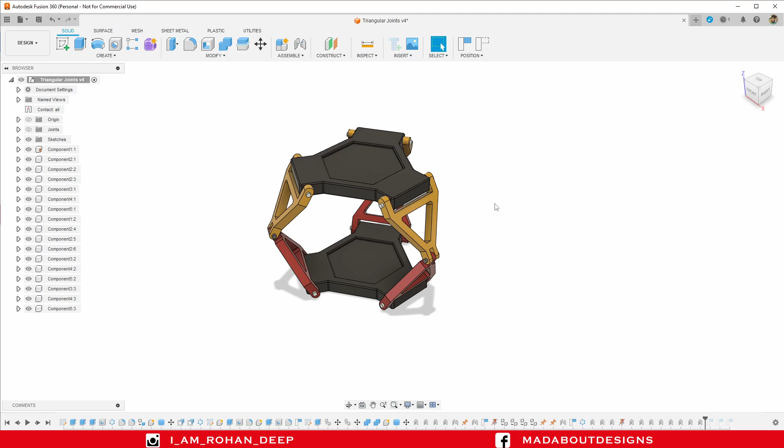In this tutorial, I'm going to show you exactly how to design this triangular podium system using Autodesk Fusion 360. If I rotate this part, this podium is coming downward, and if I pull it, it goes upward. I can also bring this part inward like this, and it moves up to a certain point.

Here are the tools and commands I am going to use in this tutorial and the dimensions of the full assembly. All the dimensions may not be given here, so watch the full tutorial to get all the dimensions.

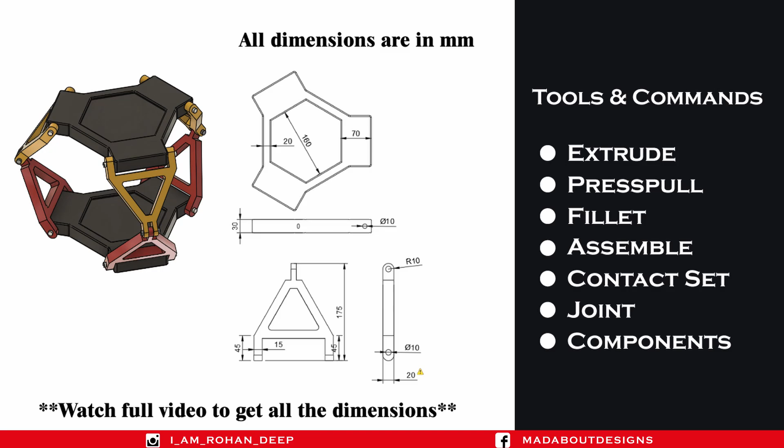Now, without wasting time, let's get into it.

First, create a new design by going to File and select New Design. The unit I am going to use in this tutorial is millimeter.

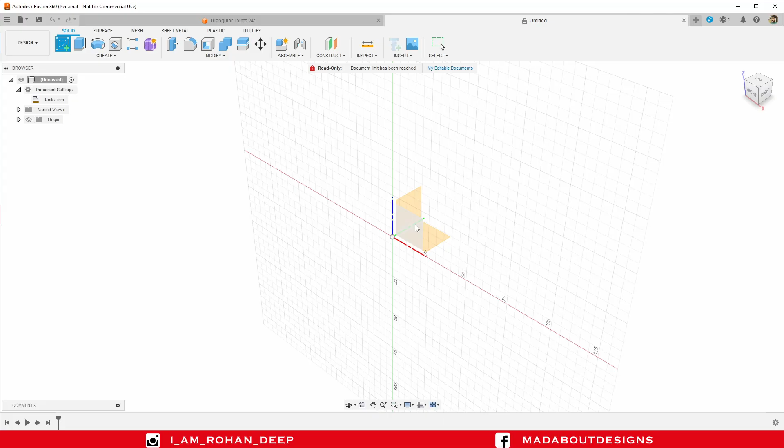Create a new sketch on the top plane. Under Create, go to Polygon, Circumscribe Polygon. Select the center as the origin. I am going to draw a six-sided polygon, that is a hexagon of dimension 100 mm.

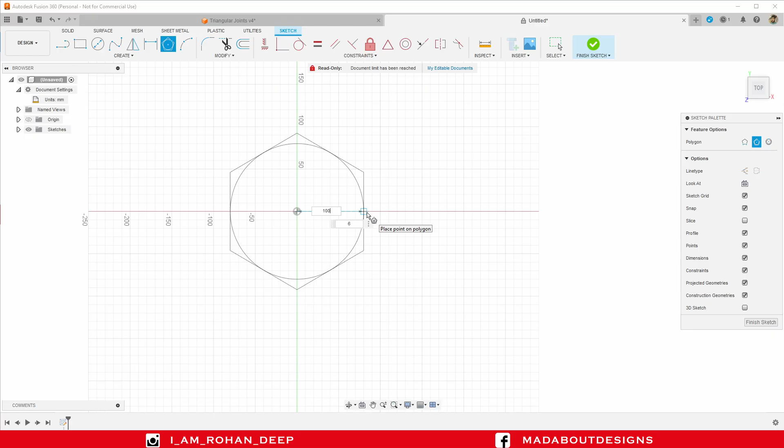Draw another concentric hexagon of dimension 80 mm. Finish sketch.

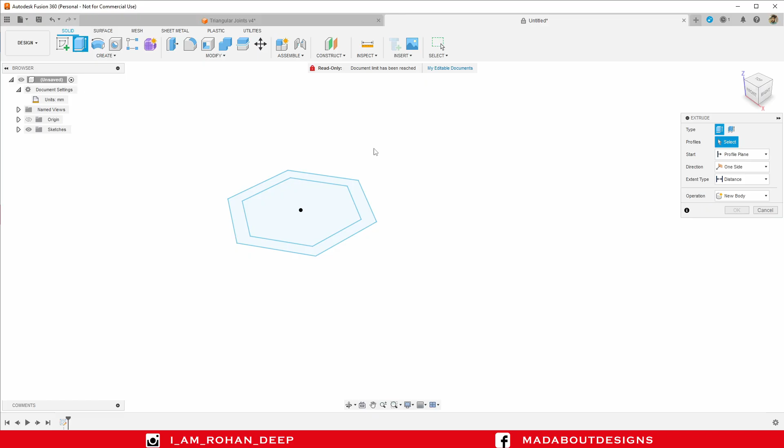Go to Extrude command. Select this inner profile. Extrude it up to 10 mm. Direction symmetric. Click OK. Turn on the visibility of the previous sketch by going here.

Go to Extrude again. Select this outer profile. Extrude it up to 15 mm. Change the direction to symmetric, operation join, and click OK. Hide sketch 1.

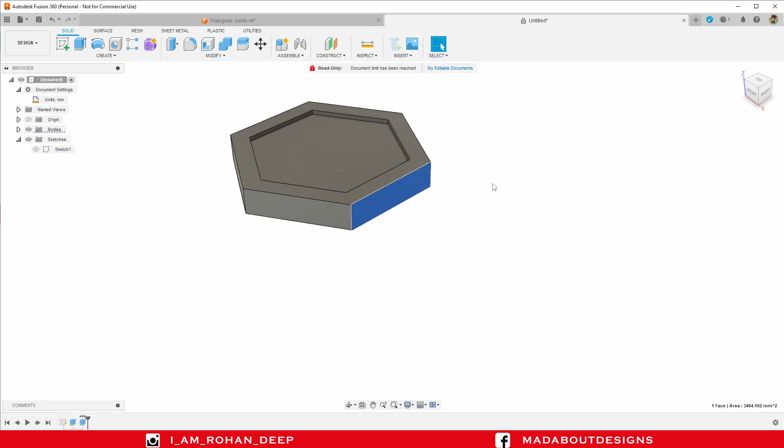Now I am going to extrude this surface of our body. Go to Extrude command. The surface has already been selected. Drag it outward up to 50 mm. Press enter.

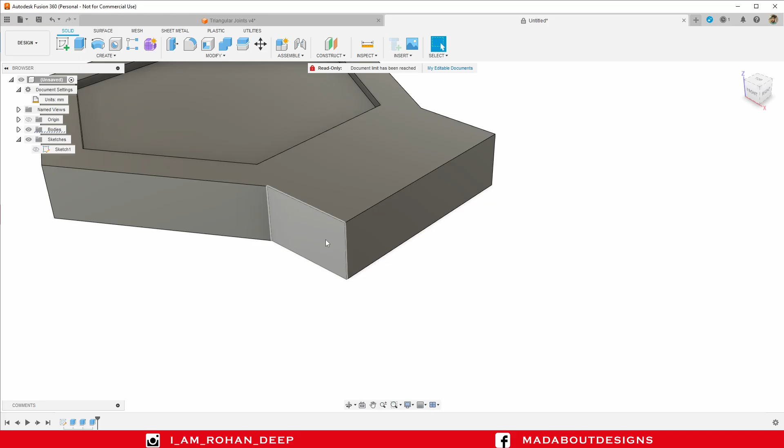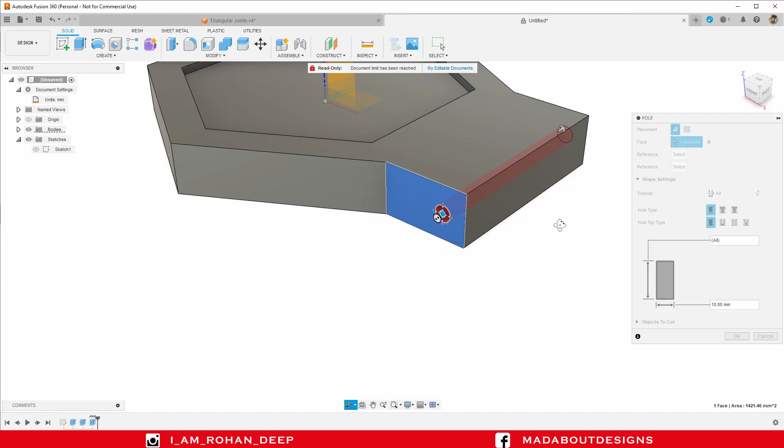Create a hole on this surface. Under Create, go to Hole. Select this surface. Diameter 10 mm, and for the distance, change the hole length to All, so that the hole will be created throughout the whole body.

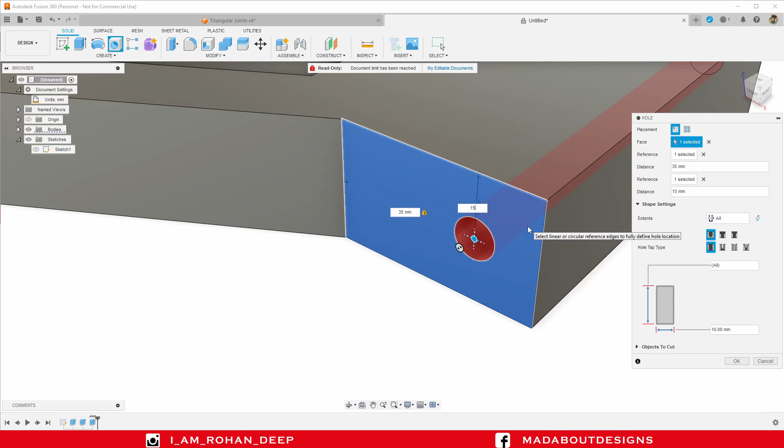For the reference, select this line and provide a distance of 40 mm. Make it 35 mm. And for the second reference, 15 mm. Press enter. Here the hole has been created.

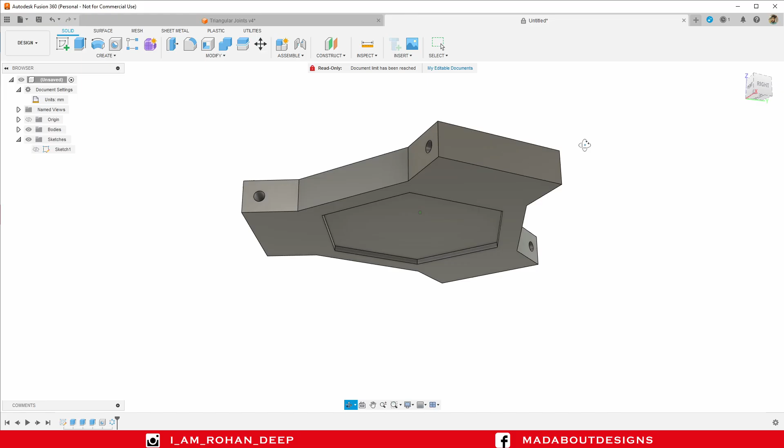Now I am going to pattern this extruded part and the hole throughout the whole body. Under Create, go to Pattern, Circular Pattern, Object Type Features, and for the objects, select this hole and this extrude. For the axis, select this Z axis, number of quantity 3, distribution full, and click OK. Here the features have been patterned successfully.

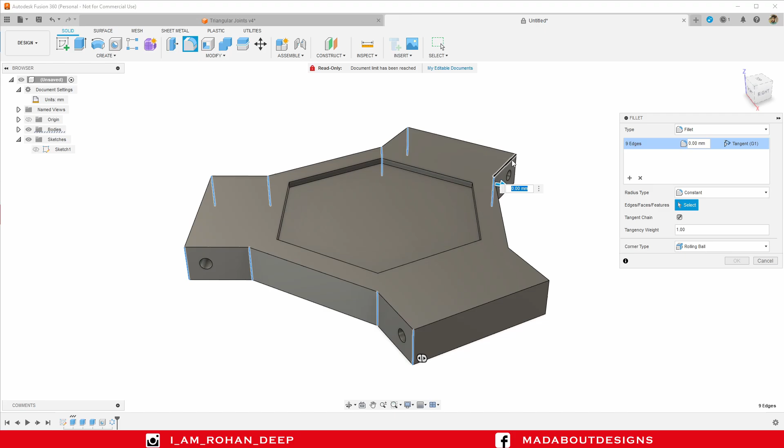Now I'm going to provide some fillet on these edges. Press F to go to the fillet command. Select these edges one after another. Fillet them up to a radius of 5 mm. Press enter.

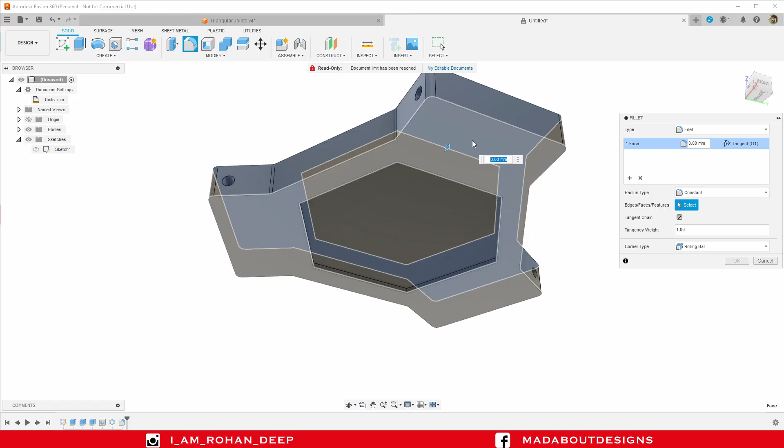Right click and repeat fillet. Select this top surface and this bottom surface and fillet it up to a radius of 2.5 mm. Press enter. Here our base has been created successfully.

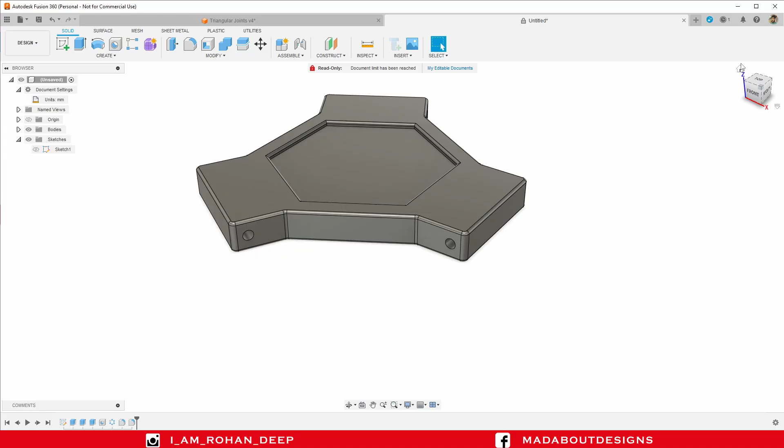Now I am going to create a cylindrical part here, about which the other components are going to rotate. Under Create, go to Cylinder, select this surface, and as the center, select this center.

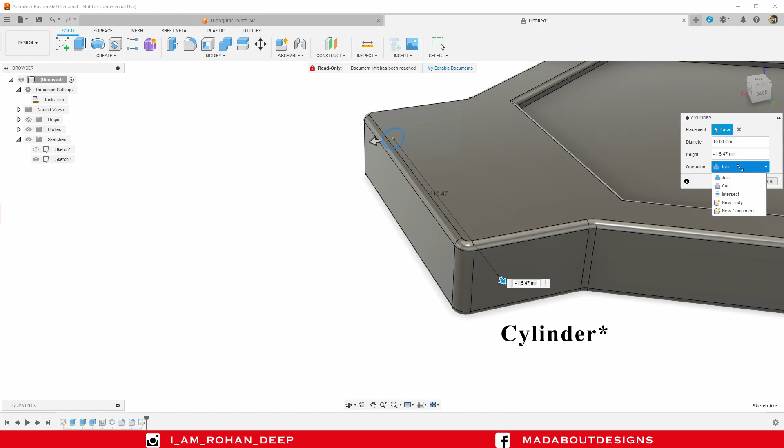Provide it a diameter of 10 mm. Drag it in this direction and click on this surface, so the cylinder we are going to create will be extruded up to this surface. Change the operation to New Body. Click OK.

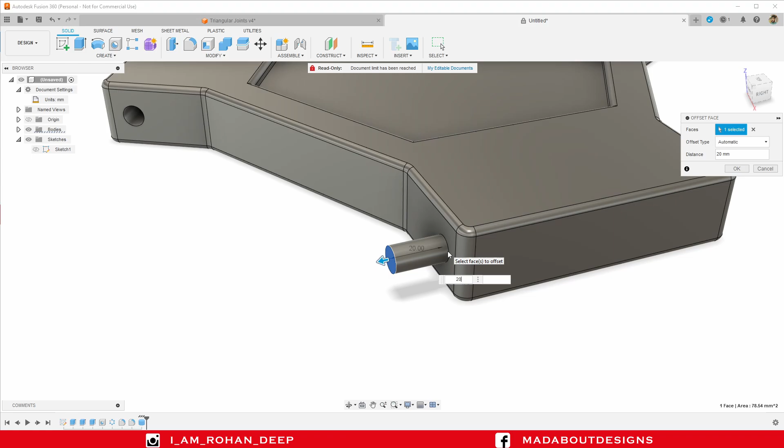Now go to Press Pull. Select this cylindrical body, this face of our cylindrical body, and extrude it up to 20 mm. Press enter. I am going to repeat the same thing on the other side.

Right click and repeat Press Pull. Select this surface, offset type New Offset. Provide it a distance of 20 mm. Press enter.

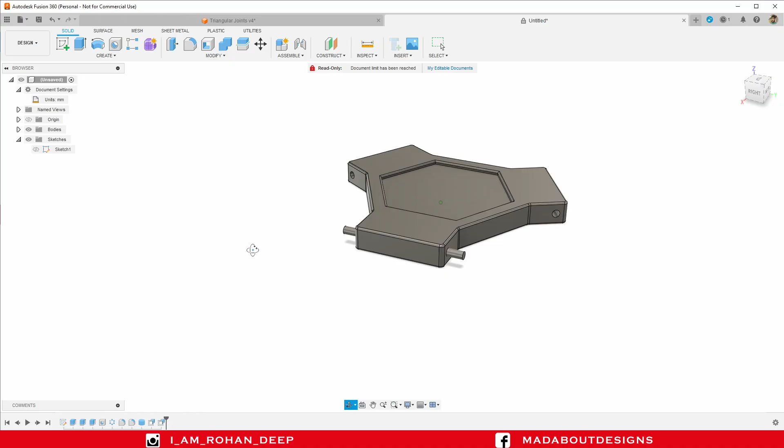Now we have got these two bodies. Under Bodies you can see we have these two bodies.

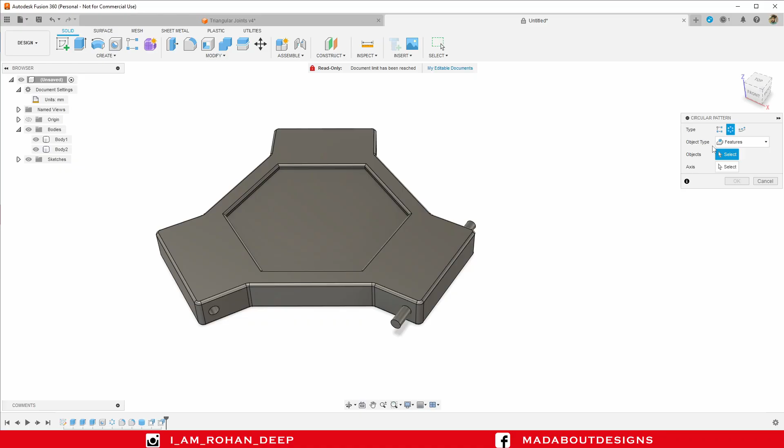Now I am going to pattern this circular body around this one. Under Create, go to Pattern, Circular Pattern, Object Type Bodies, select this cylindrical body, and for the axis select the Z axis. Number of quantities 3. Click OK.

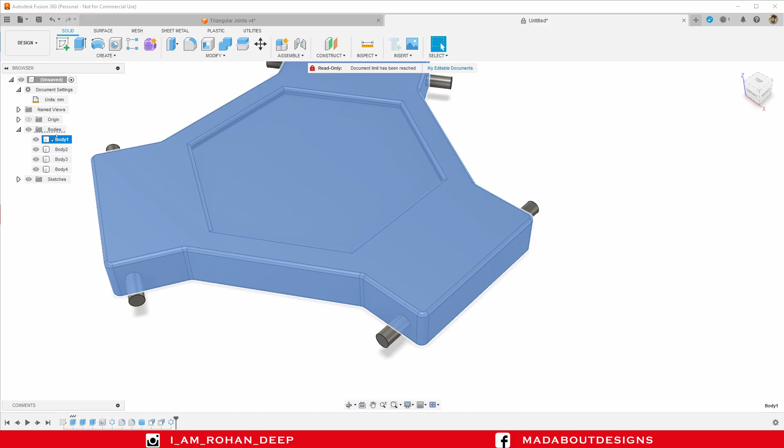Now I am going to convert this body into Component 1, that will be our base. Right click on Body 1 and create components from bodies. So our body has been converted into component Body 1.

We can easily move it as we want, whereas we can't move these bodies. Revert back to original position. Select all these 3 cylindrical bodies and drag it under Component 1. So in Component 1 we have all these 4 bodies: 1, 2, 3, 4.

Right click on Component 1 and ground it, so it won't move from its original position.

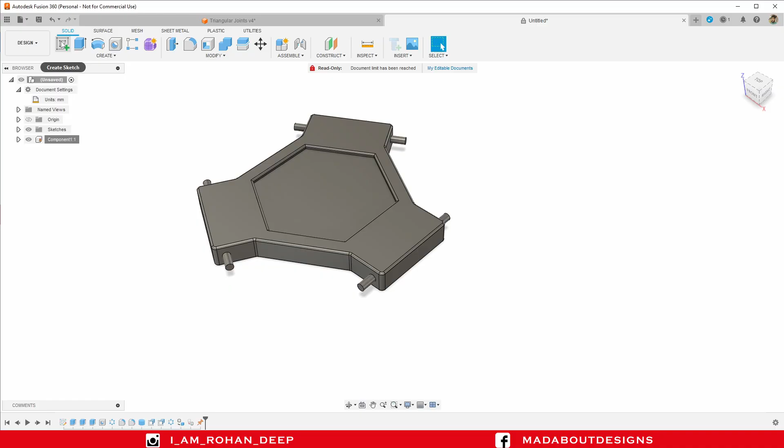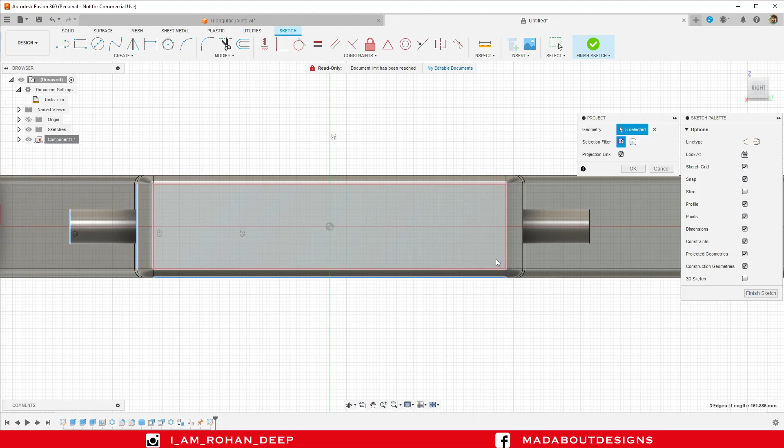Now create a new sketch on this surface. Under create, go to project, select this part of the bodies. Turn on the projection link and click OK.

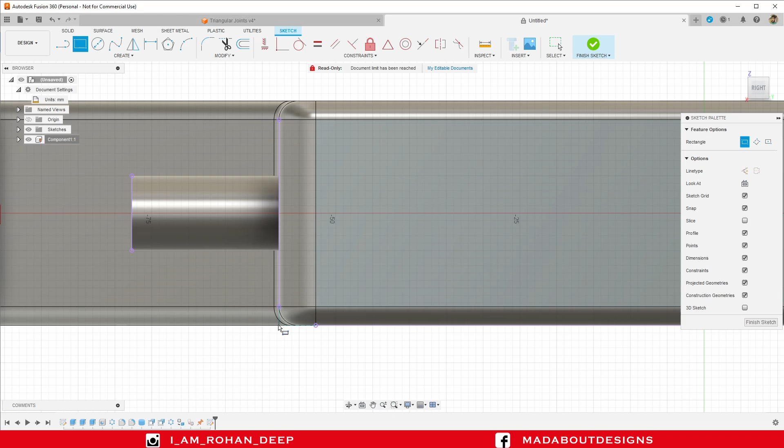Now I'm going to draw a 2-point rectangle. The first point of the rectangle will be on these extension points of these 2 points here, and give it a width of 15 mm and a height of 40 mm.

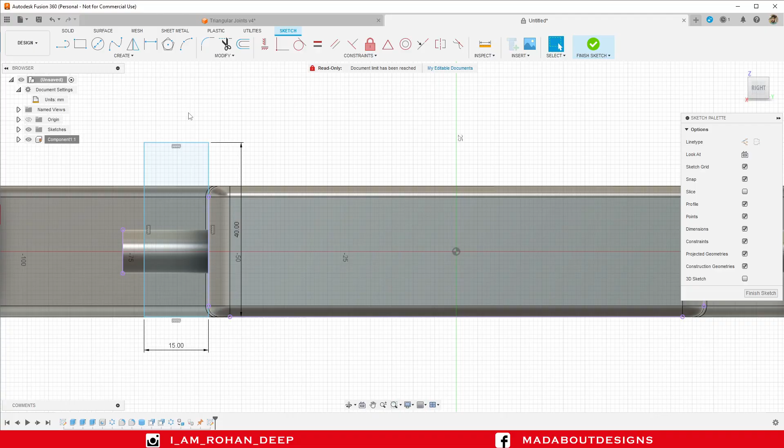Okay, delete this part. We can now extend this part. So press D to go to sketch dimension command. Select this line and provide it a height of 45 mm.

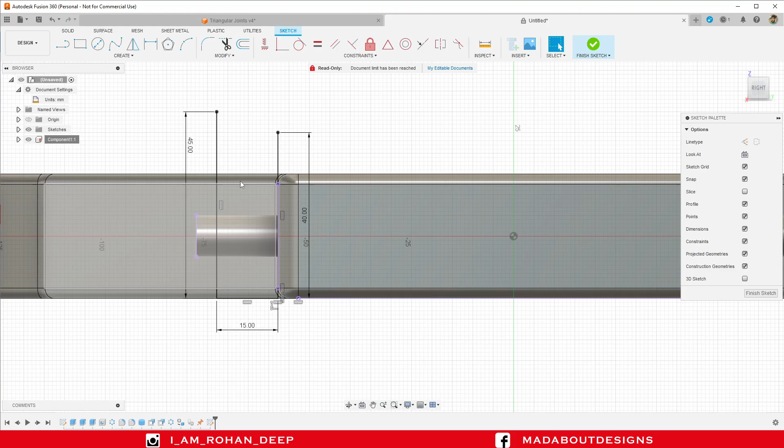Select this corner and make it horizontal or vertical with this one. Again, select this corner horizontal or vertical with this point. So our sketch has been now constrained and it won't move from its original position.

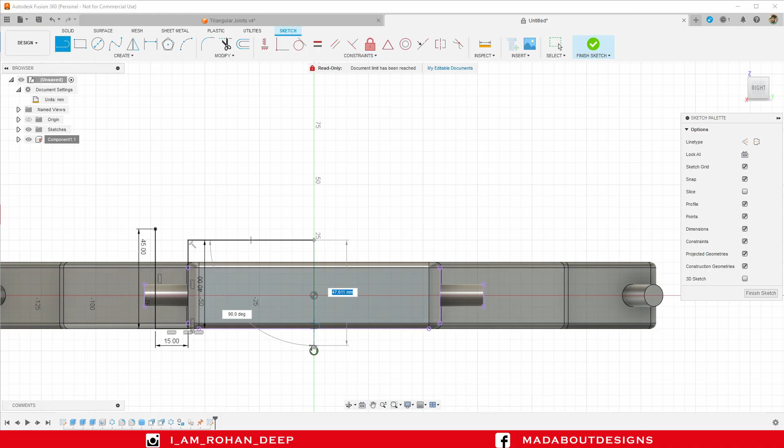Go to straight line command and draw a straight line from this point vertically aligned with the origin up to here. Turn on the construction feature and draw a straight line, vertical line up to this much. Turn off the construction feature.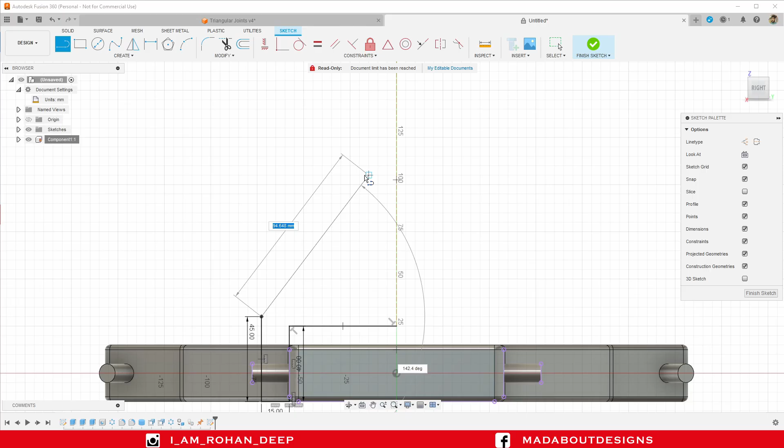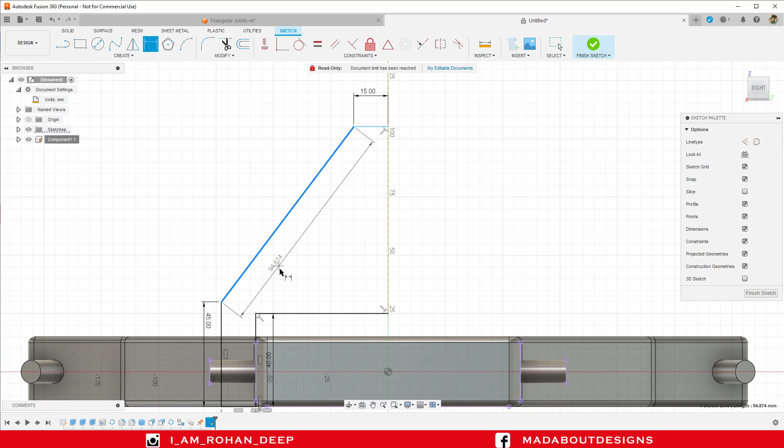Now draw one inclined line up to here, continuing up to here. Press D to go to sketch dimension command. Select this line and provide it a distance of 15 mm. Select this line and this horizontal line and provide an angle of 60 degrees.

As you can see, this vertical line has moved from its original position. So, in order to align this line with the origin, select this line, click on horizontal or vertical. You can also select this point, horizontal or vertical with this origin. Okay, now it looks good.

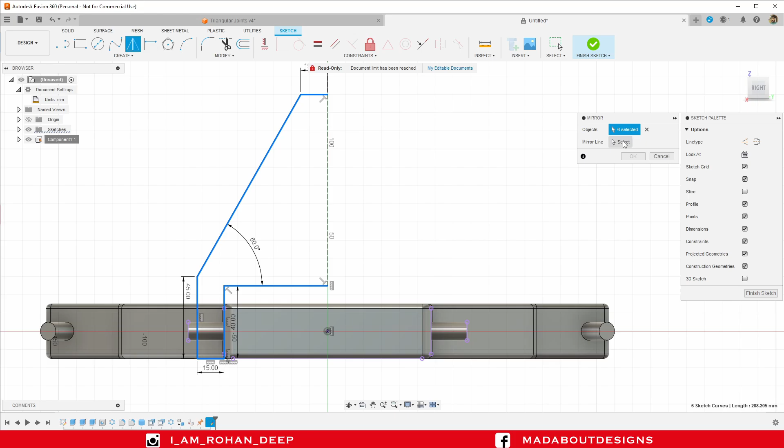Press escape. I'm going to mirror all these portions of the sketch on the other side. So double click on this line. Now all the sketches have been selected. Under create, go to mirror. For the mirror line, select this vertical line.

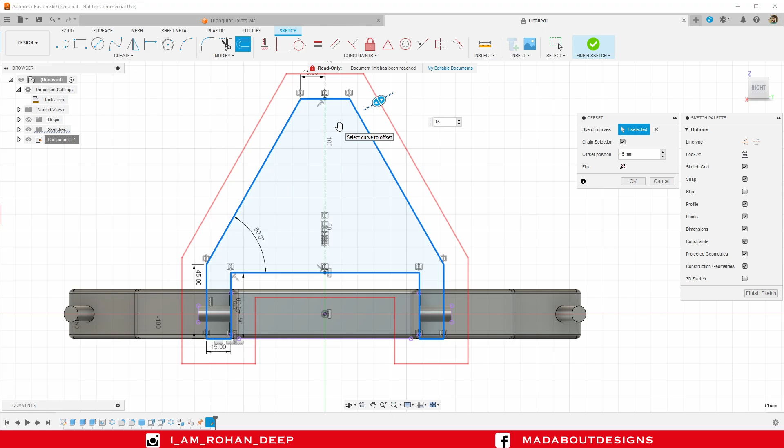Click OK. Now press O to go to offset command. Select these 2 parts of the sketch and offset it up to 15 mm. In order to move it inward, put a minus on the front. Press enter.

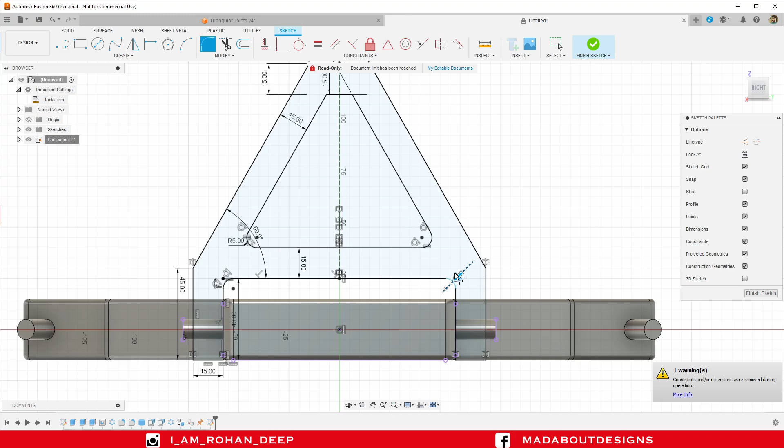Now it looks good. I'm going to provide some fillet on these 2 corners. So go to fillet, select this corner and provide a radius of 5 mm. Do the same thing on the other side and on these sides too. Press enter.

Our sketch is almost finished, so sketch, finish sketch. Go to extrude command again. Select this profile. Drag it outward up to 20 mm. Operation, new component, and click OK.

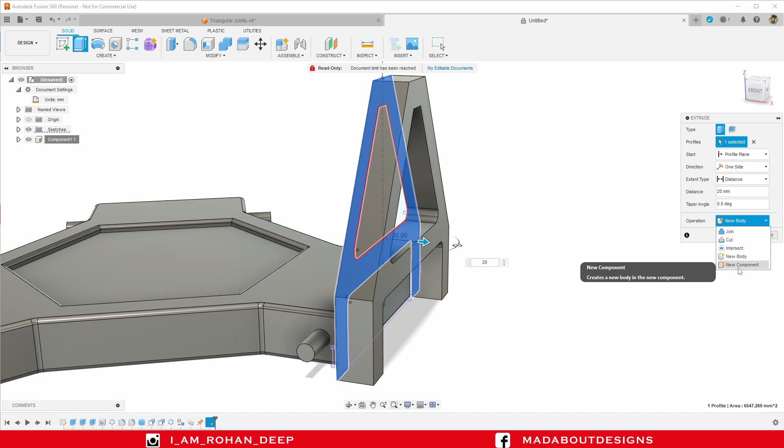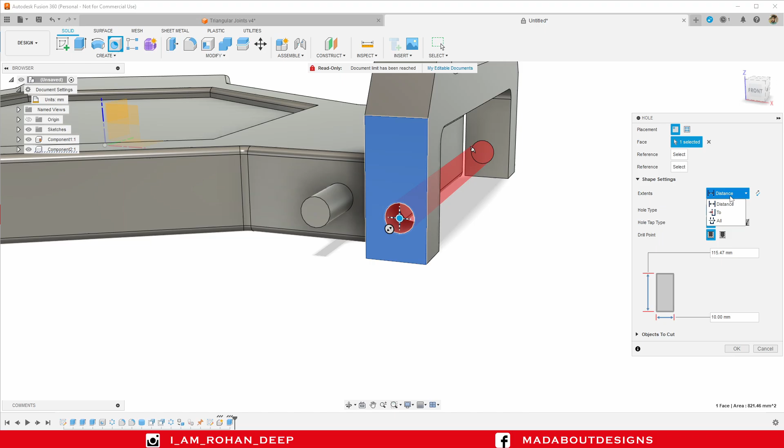Here you can see this body has been already converted into component. Now I'm going to create a hole on this surface. So go to hole, select this surface, move it inward, hole diameter 10 mm, and the hole extents, change it to all.

For the first reference, select this line and provide a distance of 15 mm. For second reference, select this line and provide a distance of 10 mm. Press enter.

Press F to go to fillet command. Select these edges and fillet them up to a radius of 10 mm. Press enter.

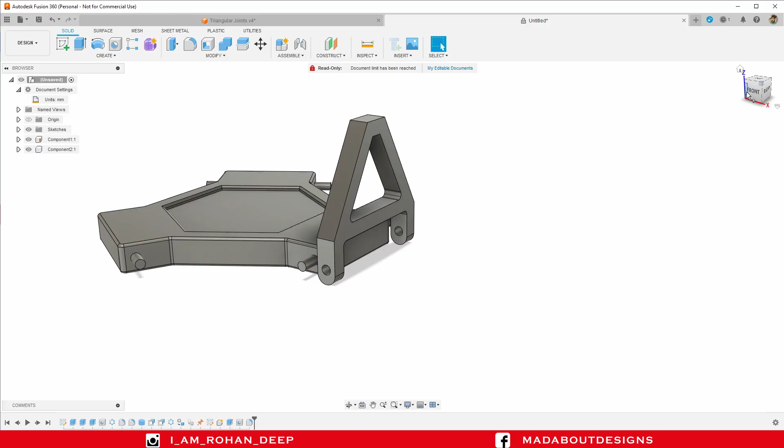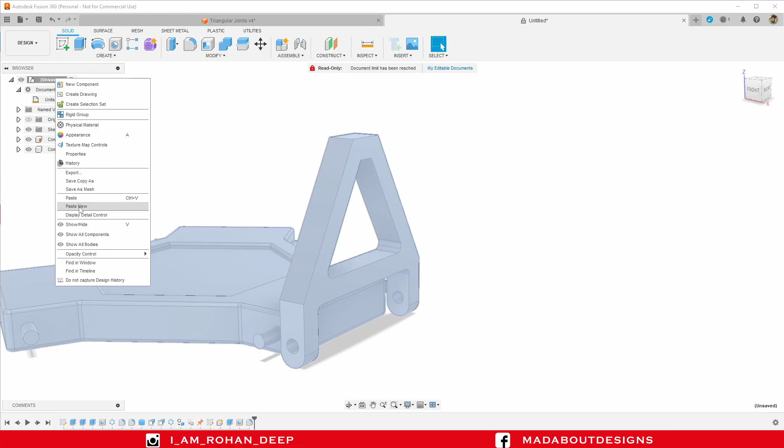Now I'm going to create a new component from this one. So right click on this component and copy it. Right click on our main assembly and paste new. Here is our new component, component 3. If I move it in this direction, here you can see we have got our two new components. Capture position and click OK.

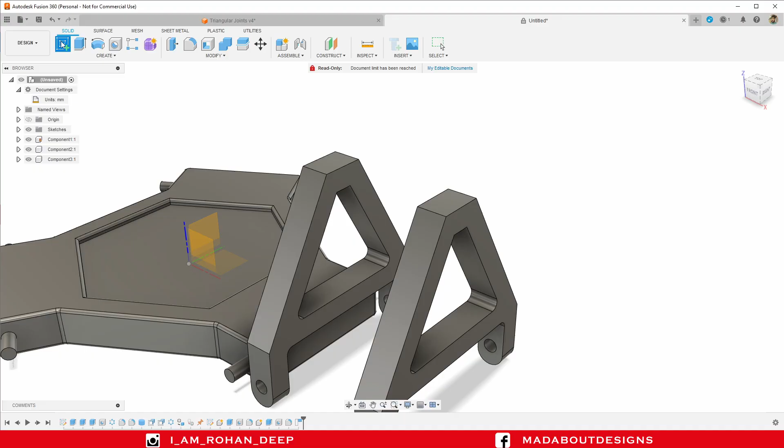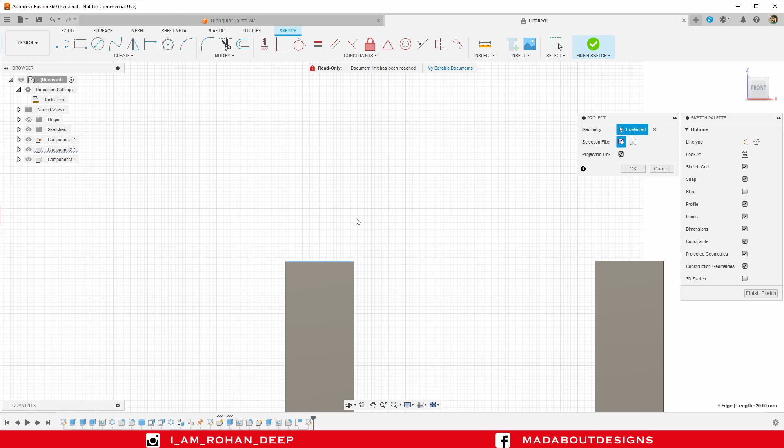Now I'm going to work on this component. So create a new sketch on this front plane. Press P to project, or you can directly go from here, project. Selection filter, specified entities. Select this line and click OK. Or I can create another body on this component too, so I'm going to project this line too. Click OK.

Go to 2-point rectangle, select the first point here and provide it a dimension of 30 by 20 mm. Press enter.

Go to center circle. Select the center as the geometric midpoint of this line and diameter 20 mm. Draw another concentric circle of diameter 10 mm.

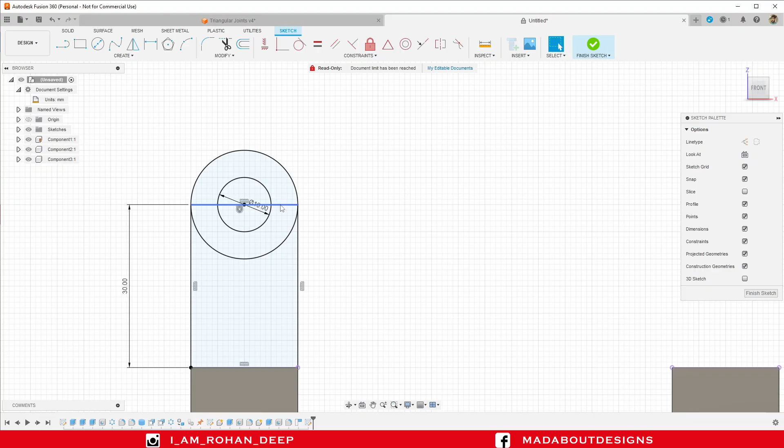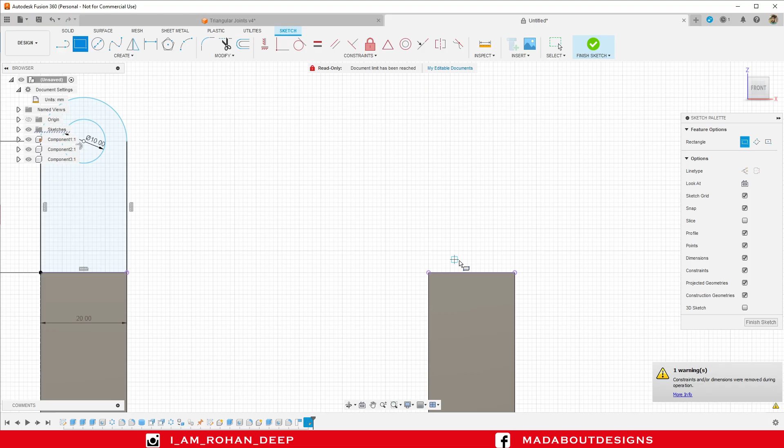Press escape and select this line, delete it. Trim out this unnecessary portion. I am going to redraw this whole part here. So go to 2-point rectangle and draw the rectangle here of dimension 30 by 20 mm.

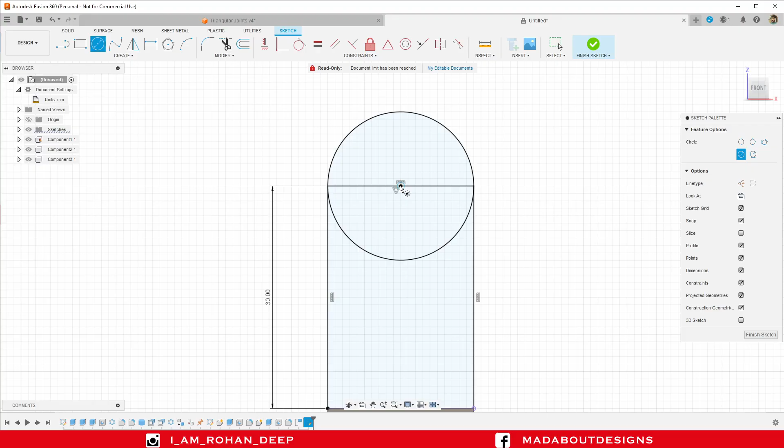Go to center diameter circle, select the center as the geometric midpoint and give it a diameter of 20 mm, followed by another concentric circle of 10 mm diameter. Press escape and trim out these unnecessary portions.

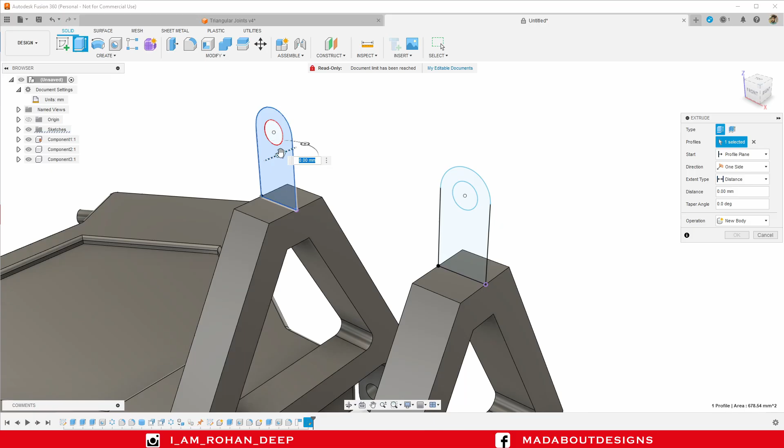Finish sketch. Go to extrude command, press E to go to extrude. Select this profile, drag it outward up to a distance of 5 mm. Change the direction to symmetric, operation join, and click OK.

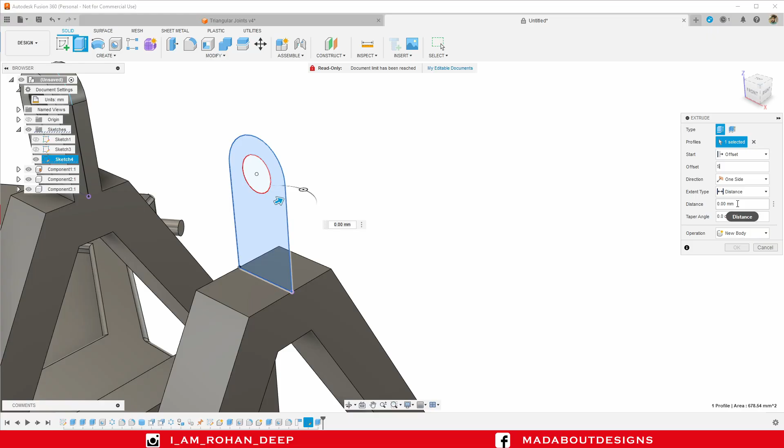Turn on the visibility of the previous sketch by going here. Repeat extrude. Select this profile. Now change the start plane to offset, provide an offset distance of 5 mm and an extrude distance of 10 mm. It looks good. Operation join and click OK.

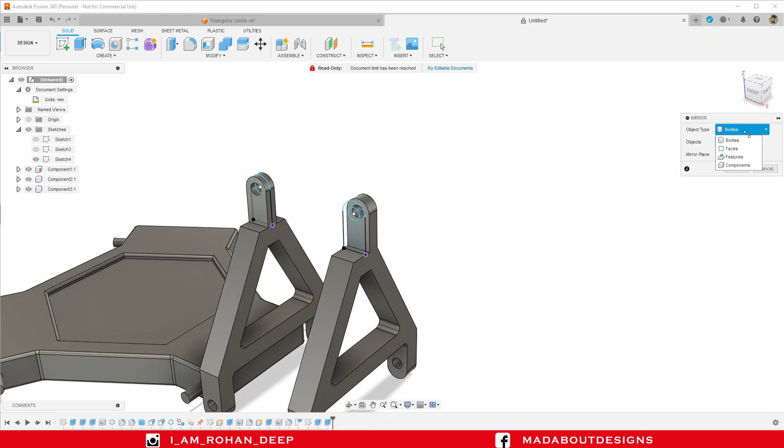Now I'm going to mirror this feature with respect to this plane. So under create, go to mirror, object type features, mirror plane this plane. And for the object, select this previous extrude. Compute option adjust, click OK.

It looks good, so hide sketch 4.

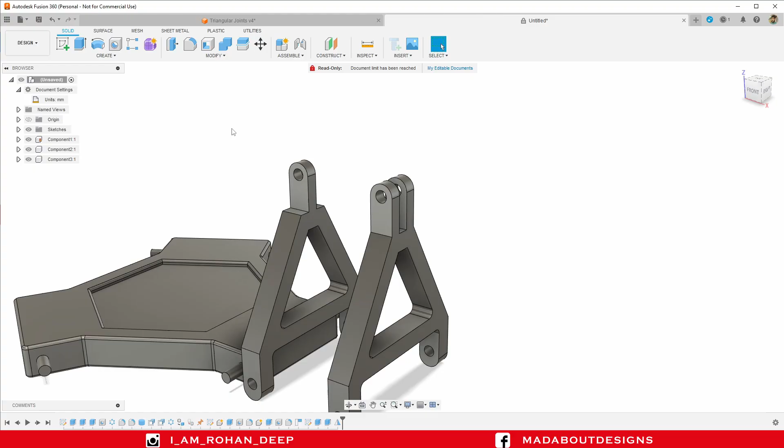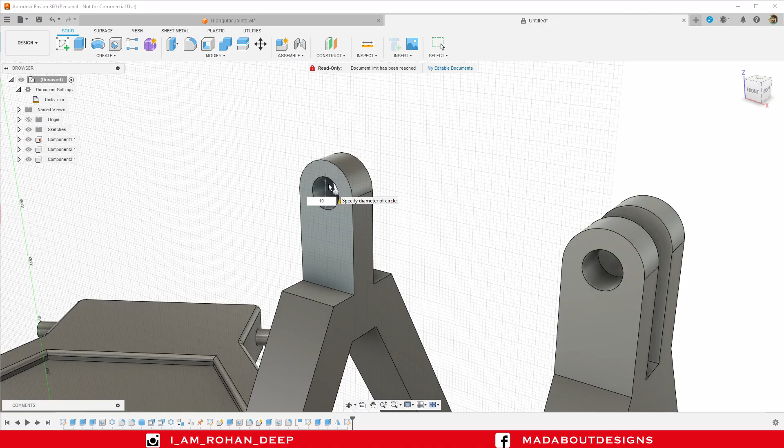Now I'm going to create a cylinder for this part. So under create, go to cylinder, select this surface, select the center of the cylinder as the geometric midpoint of this circle, provide it a diameter of 10 mm and an extrude distance of 40 mm. Operation new body, change it to new component and click OK.

Here is our new component. Press M to move this component. Move object, components, select this component, drag it inward up to -25 mm, capture position and click OK.

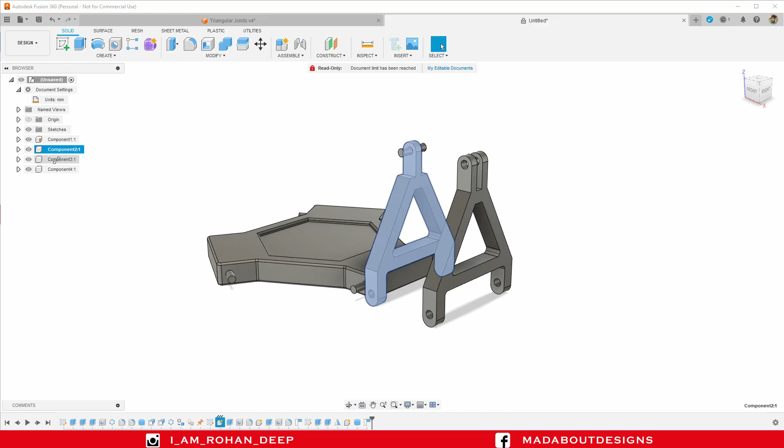Here is our component 1, 2, 3 and 4. It's time to assemble them.

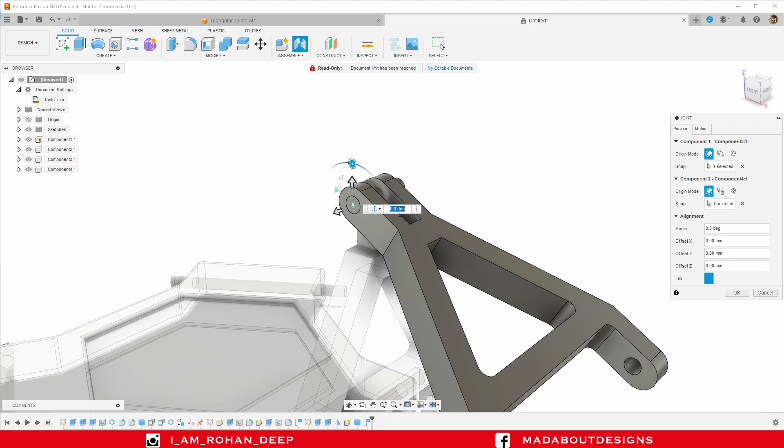Under assembly, go to joint, select this surface as component 1 and for component 2, select this surface. Motion revolute, and for the position, slide it in this direction up to -5 mm. Rotate it up to 180 degrees.

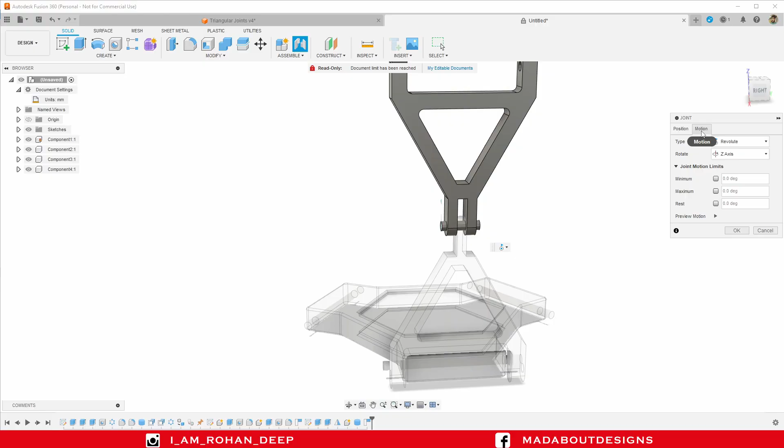Preview the motion. It looks okay. So click OK.

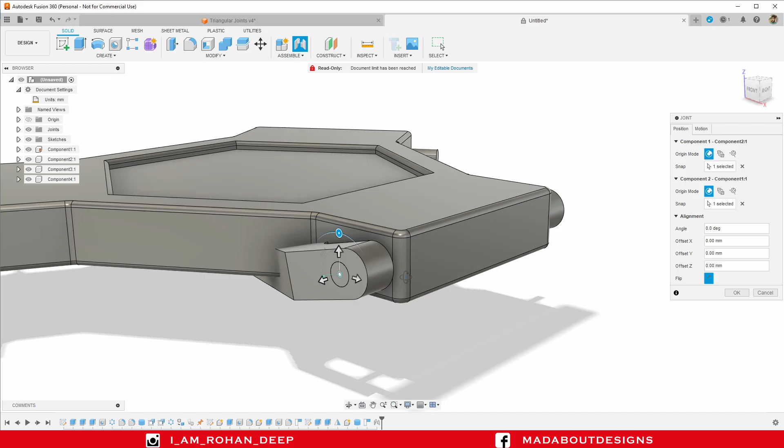Right click and repeat joint. Select this surface of our component and select this cylindrical surface. Drag it inward up to -5 mm. Motion revolute, preview the motion. It looks great, so click OK.

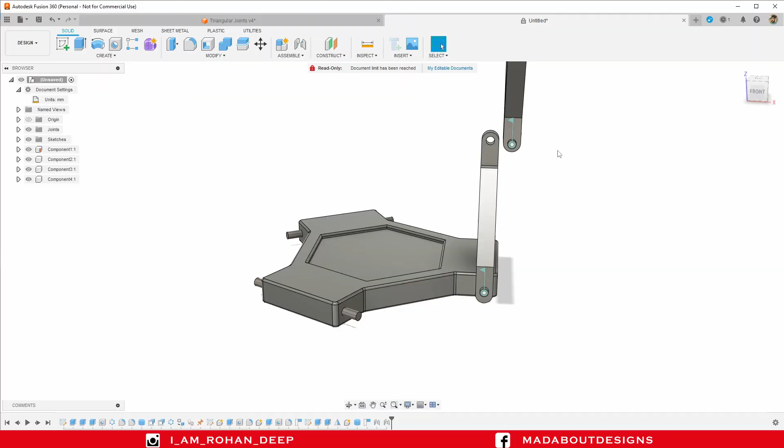I have not provided yet any joints between this cylindrical component and this one. So right click and repeat joint. Select this surface and this surface. Drag it in this direction up to -15 mm and click OK.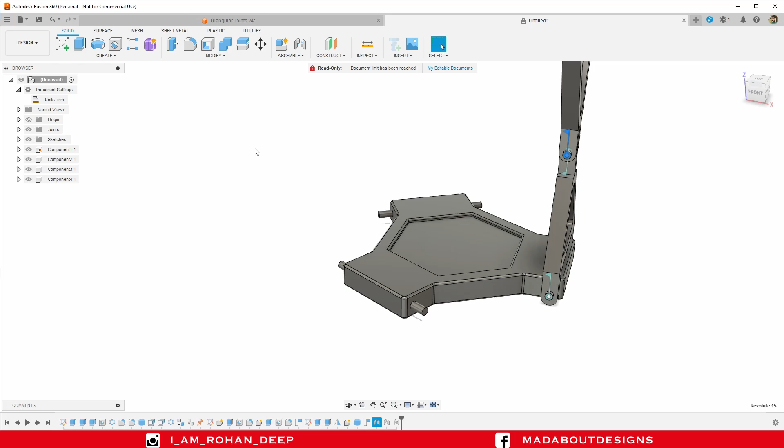Now I am going to pattern these three components along this body. So under Create, go to Circular Pattern, Object Type Components. For the object, select these three components, and for the axis, select this blue axis. Quantity 3 and click OK.

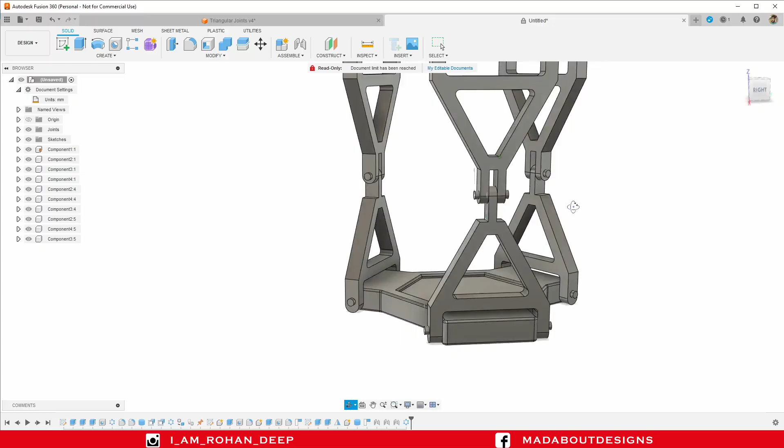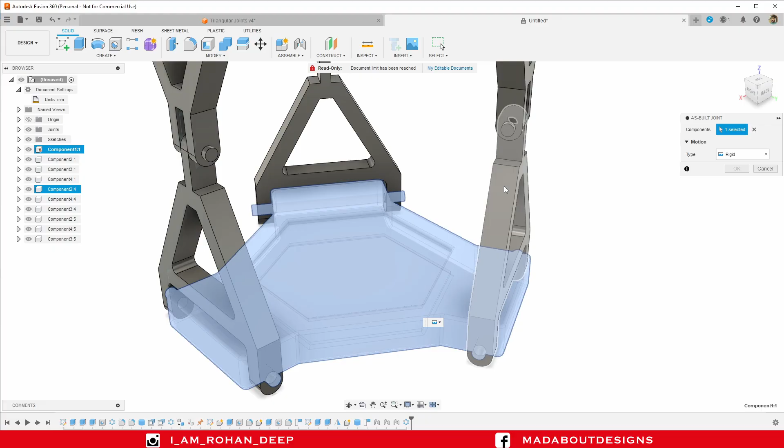Now repeat the same joining process for all the remaining components. So right click, and this time I'm going to apply the as-built joint instead of the joint process. Click on as-built joint, select this component and this component, change the motion type to revolute, and for the snap surface I'm going to select this circular surface. It looks okay, so click OK.

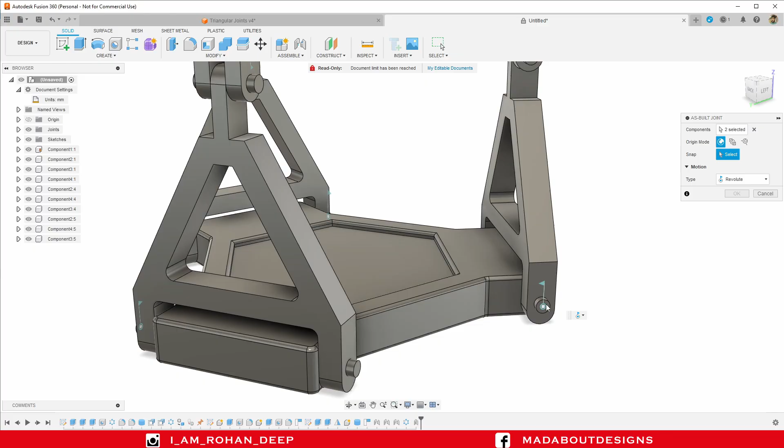Right click, repeat as-built joint, again select these two components, and for the snap option I'm going to select this surface. Click OK.

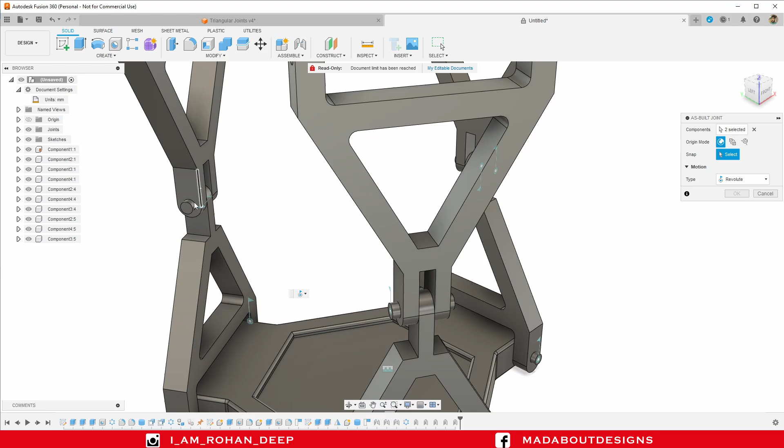Right click, repeat as-built joint, these two components, change the motion type to rigid, click OK. Right click, repeat as-built joint, these two components, type rigid, click OK. Right click, repeat as-built joint, these two components, type revolute, snap option this surface, click OK. Repeat as-built joint, these two components, snap option this surface, click OK.

The assembly is almost complete. Now unground this base, press M.

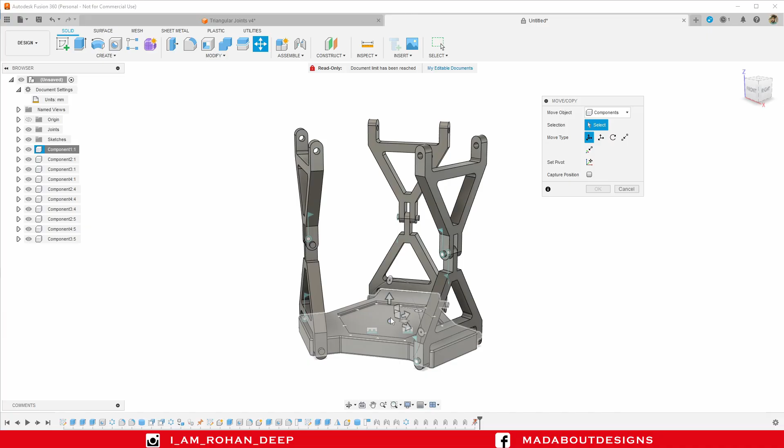Go to Move or Copy option, Move Object Components, select this base, turn on the Create Copy option, drag it upward up to 320 mm.

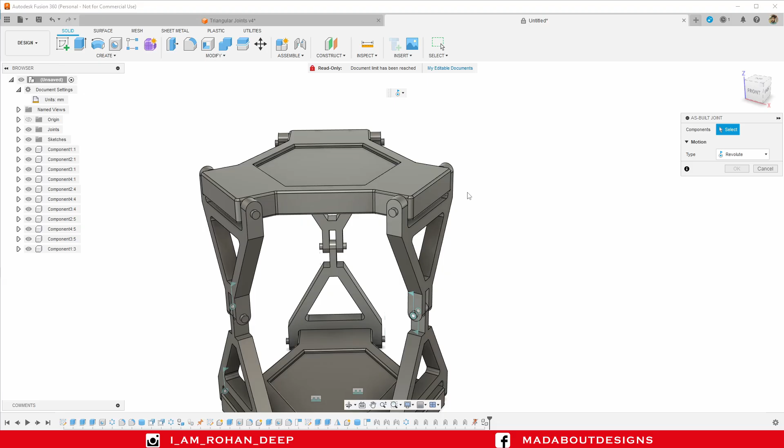It looks great. I can apply the same as-built joint here too. So click OK. Go to Assembly, as-built joint. Select these two components, and for the snap option, select this circle.

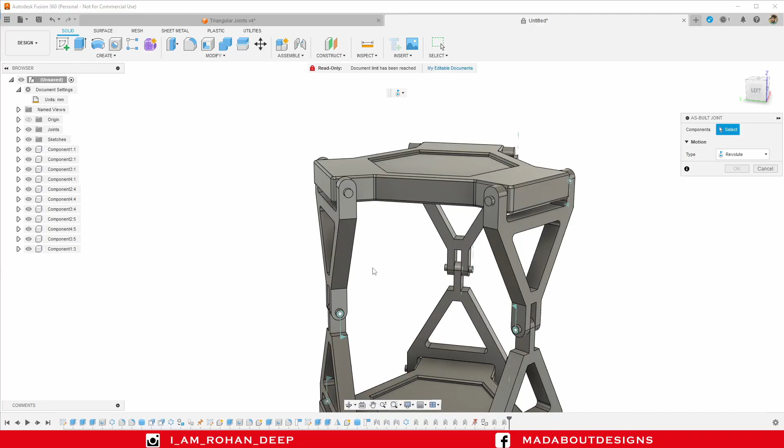Click OK. Right click, repeat as-built joint. Repeat the same process here, and repeat the as-built joint for the last time here. Motion type revolute, click OK.

Now I think I have applied all the joints. Let's see. Before providing any kind of motion, I need to ground this base again. So right click and ground it. Now if I try to rotate this component, it is working properly.

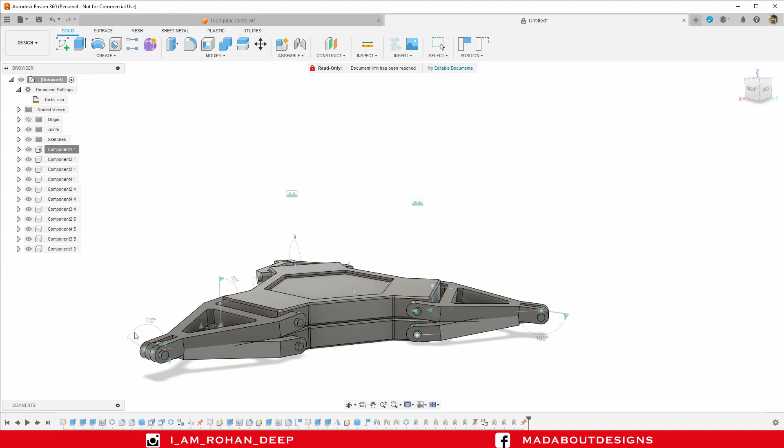Now as you can see, they are overlapping on each other. In order to prevent this, under assemble, turn on this enable all contact, so the contact between the components will be activated. Now if I try to rotate it, as you can see, it does not go beyond this point.

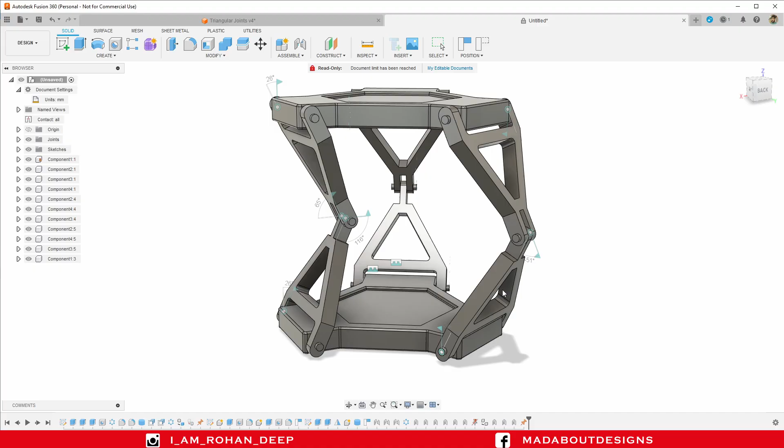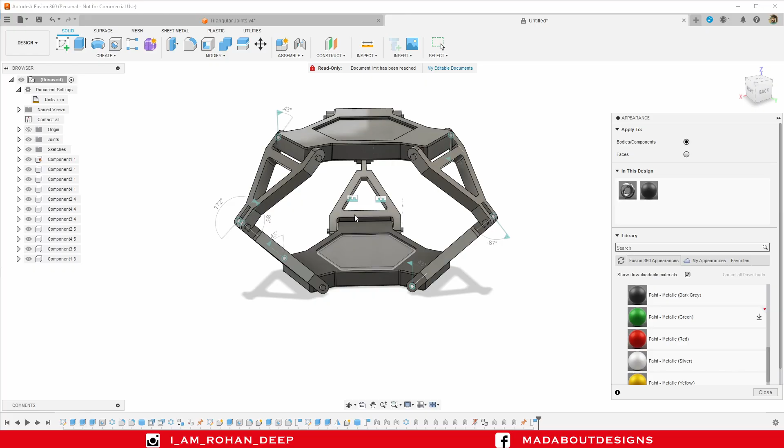Here is our triangular podium design ready. Press A to go to appearance. I'm going to apply this metallic color on the bases, yellow color on the hinges, or you can say the links, red color on the lower links, and white color on the cylindrical parts.